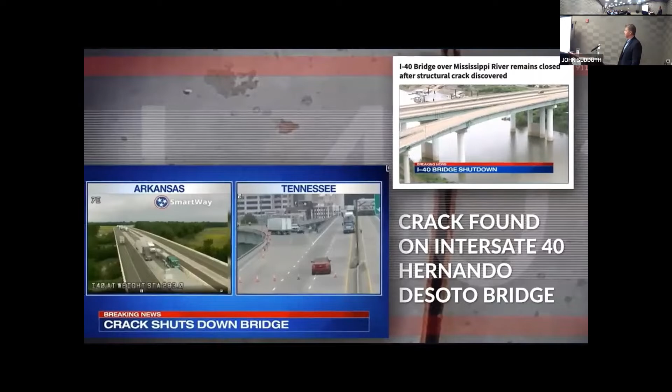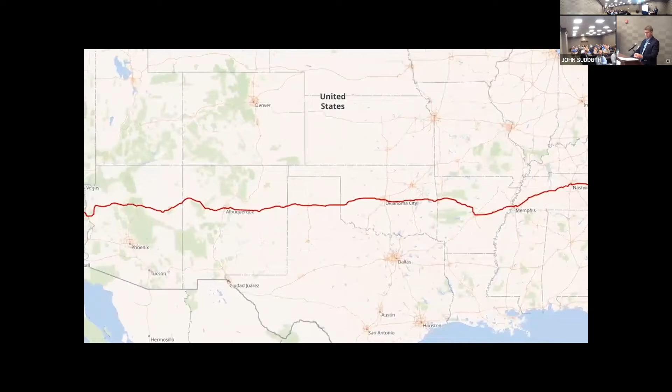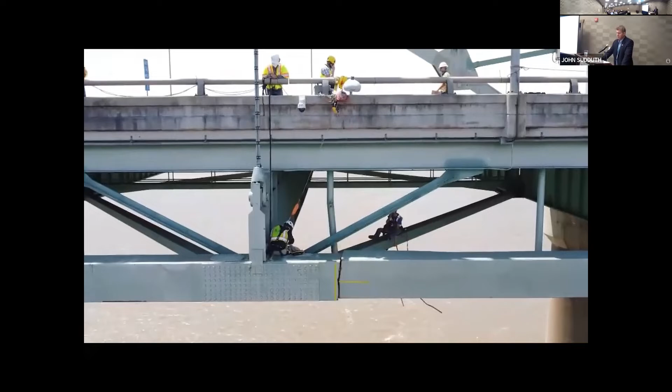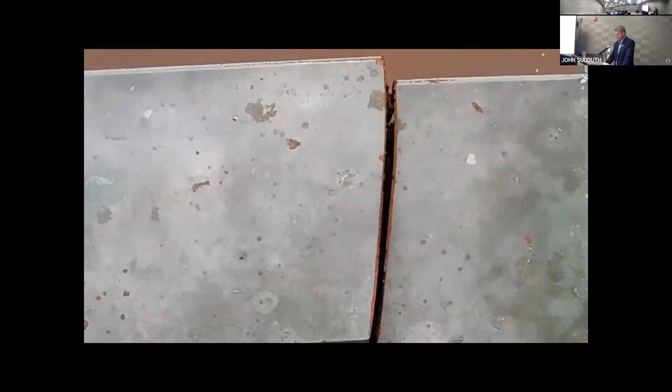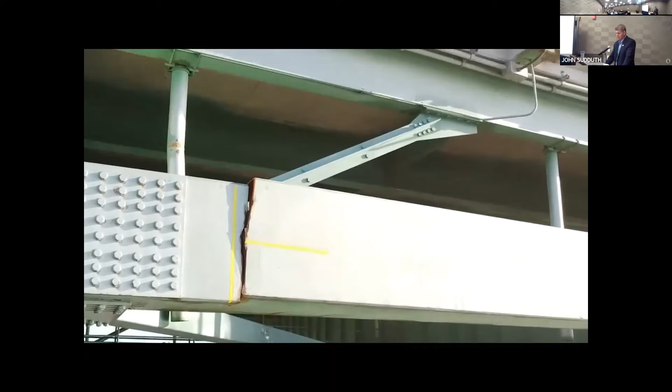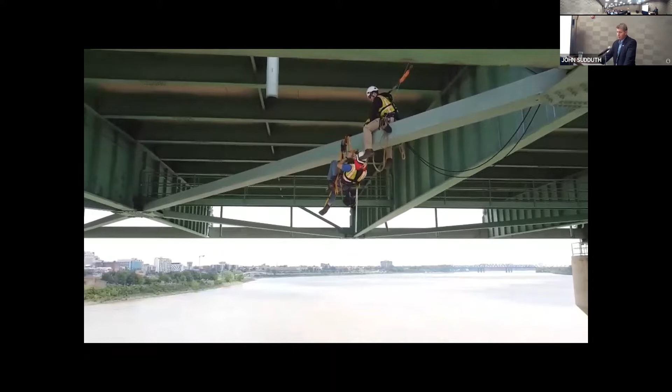To actually see it in real life is startling, but it took a few minutes for it to sink in. Because we had only seen the crack from the top, we really needed to understand the extent of the damage around that member, so the UAS team set up on the bank of the river. The design of the repair was challenging because one of the first things we had to do was determine whether or not it was safe for the work to be done on the bridge. We had to understand the condition of the bridge at the point of the fracture, how much load was in the members, and how much stress was going to other places of the bridge. So we focused on getting the bridge stable so that we could strengthen it first, then safely work on the bridge and reopen it to traffic.

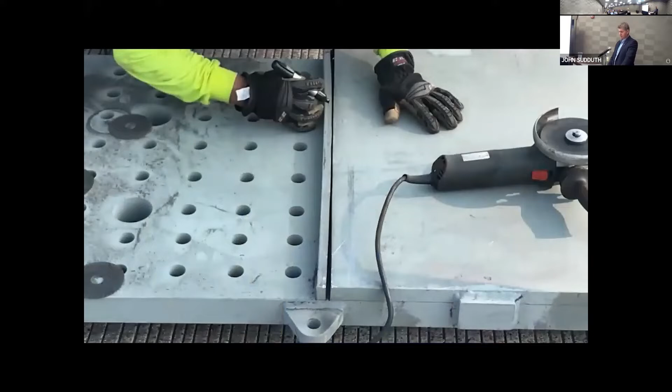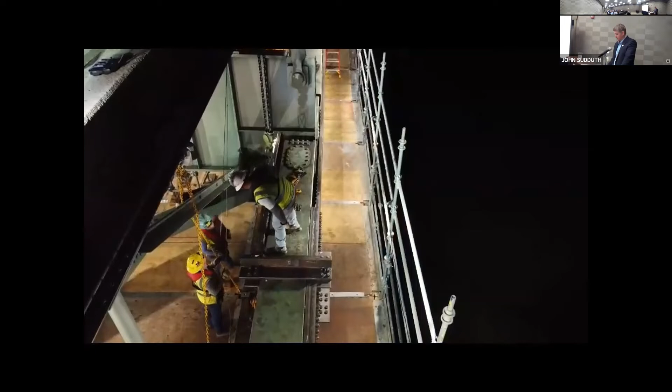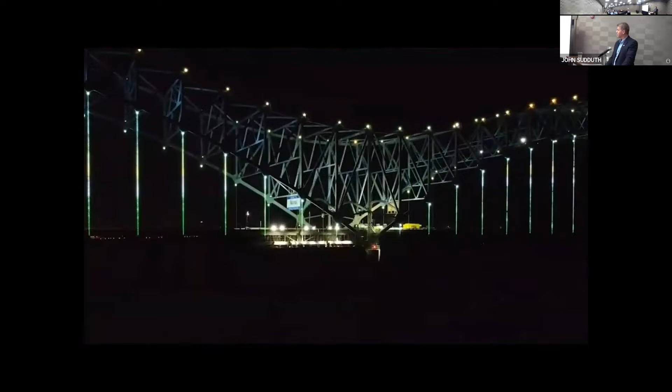From a client's perspective, TDOT is looking for a solution that will carry this bridge for decades to come. The design team is looking for a repair they can stand behind, that they know will meet TDOT's goals. And from a contractor's perspective, we're looking, first and foremost, at this as an emergency repair job: how can we implement a repair as quickly as possible and get traffic open, while maintaining the safety of personnel doing the work and avoiding further damage to the bridge itself. Basically, put the bridge back to where it would have been originally, plus add additional capacity, which gives TDOT and ARDOT confidence to tell the public that this bridge will be here as a landmark in Memphis for decades, or 100 years to come.

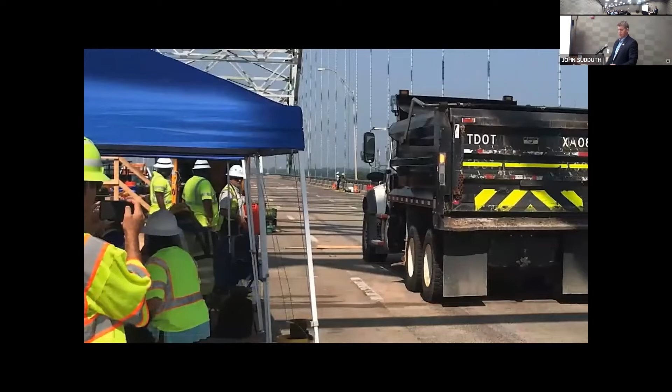Everybody's focus and advocacy to get that bridge open, to do whatever was needed, working together was pretty incredible to me. There were so many people involved at one point or another, and each one had a very important part in getting that bridge open. The multi-agency coordination was amazing. It was ARDOT, TDOT, the Arkansas and Tennessee Federal Highway Administration offices. It also included our consultant, AGCD, Michael Baker, and the contractor, who came on board pretty quickly after the fracture was discovered.

I can imagine what the people of Memphis and the people traveling through Memphis were feeling at the time, so I appreciate whatever patience they had. I'm thankful for their patience, and I appreciate all the people involved in this process of getting the bridge open safely and quickly. Thank y'all very much for what you did to make that happen. Thank you.

All right, so that gives you a little bit of an introduction to the problem and the scope of what we were dealing with in this situation. It also really relays the importance of this crossing to Memphis and to the regional population down there. So we're going to talk a little bit today about the immediate response, some of the modeling and analysis that was done, our three-phased approach to getting the structure reopened quickly, and some of the lessons learned along the way.

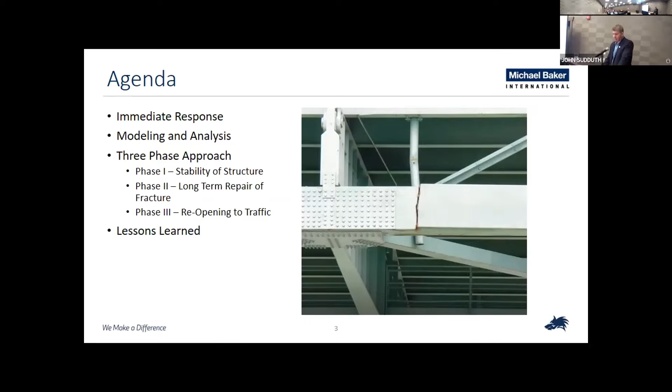So the Hernando de Soto Bridge is located between Memphis, Tennessee, and West Memphis, Arkansas. It's named for the 16th century explorer Hernando de Soto, who reportedly died near south Memphis after exploring that stretch of the river.

You'll recognize the bridge. It looks very similar to one we've got just here on the side of West Louisville. It's not unlike the Sherman Minton Bridge. There's a lot of parallels there. We'll talk a little bit about this.

This is a two-span continuous tied arch bridge, 900-foot spans, designed by Hazlett and Erdall. It's obviously a very important connector to the regional community. It opened in 1973 for the cost of about $57 million, and locally in Memphis it carries 6 of the 10 lanes across the river.

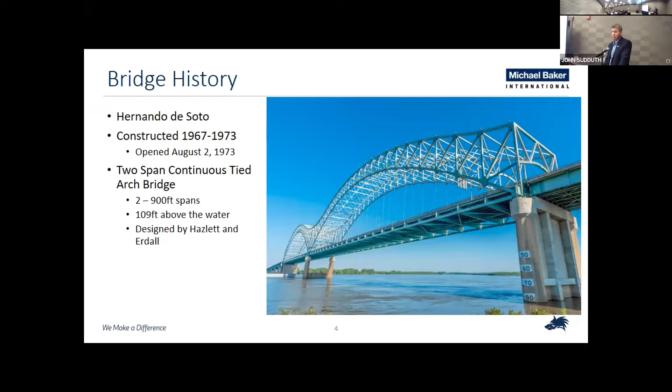The importance of the bridge was really underscored back in 2000 when the two states combined and realized they needed to retrofit this bridge for seismic considerations. That caused about a $200 million investment to improve the resilience of the structure for the long term. So, a very important crossing for the local community.

So obviously we've got an emergency out there. There was a critical find. We put our heads together to try to figure out what we could do first and how we could do it quickly. We drew upon a lot of lessons learned. We've got an emergency response plan that we developed after the Brent Spence Bridge. We started going through that and gathering as much data as we could.

In addition to the field response, we had a number of different teams that we had to get involved. We immediately began to assess the problem, diagnose it, and try to compartmentalize it into different areas that we could work on.

We knew we had a team that ultimately had to strengthen this bridge so that we could work on it. We knew we needed the analysis to get going immediately, and we also saw some individual solutions such as post-tensioning as having some benefits. So we began to quickly mobilize our teams to really get productive and dive in on this project.

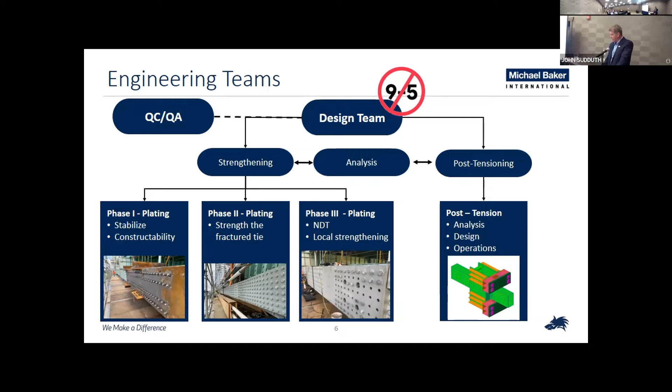This was something we knew was not going to be a 9-to-5 kind of challenge. This was one of those things where everybody's got to be committed to the project. We pulled a number of different doers in from different projects in different parts of the country. All told, we had about 60 individuals working on this project from 20 different offices across our company.

Not knowing the full severity of the fracture, we set about to use our UAS technology and techniques. They set up on the banks of the river on the Memphis side and started to monitor that. The bridge was being monitored after the fracture by both ARDOT and Michael Baker. Both organizations used drones to monitor and scan the rest of the bridge because we didn't know if we were dealing with a one-off crack or if we'd find other locations out there.

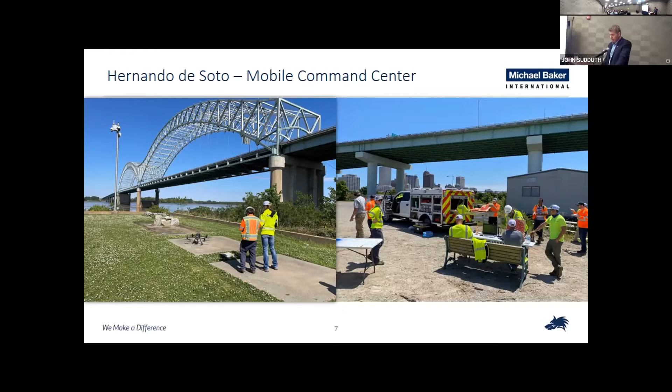We needed to know the severity. We needed to know if there was any distress elsewhere in the structure. So a complete scan of the bridge was really a helpful thing to give us more information on that.

Again, they set up on the side of the river, and one of the things we did was really a kind of unique thing. We wanted to get more information on this fracture. This was a couple of days into the project where we had identified a potential repair option. But in order to move forward with that, we really needed to know how much that tie girder had displaced during the fracture. So we set up to use kind of a combined UAS and rope access mission, if you will, to get out there and get some hands-on details.

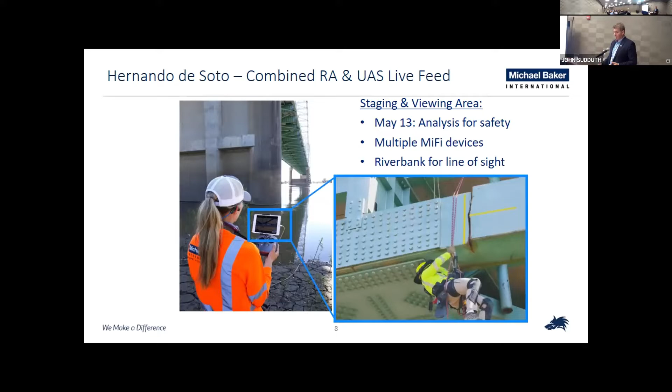In the left-hand picture, the woman's got a monitor there where she can monitor what the drone is seeing. So we utilized the drone to capture the rope access and used it also for communications. One of the things we did during that was utilize a conference call, a Teams meeting if you will, so that we could communicate effectively with the inspector in the field by Bluetooth. He had his cell phone and his earpiece and was able to hear what we were looking for.

And that video goes something like this.

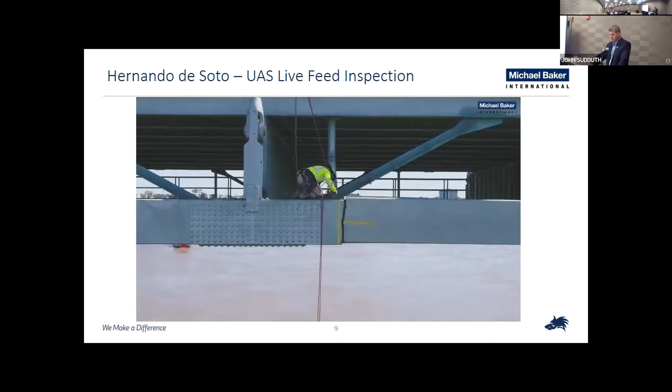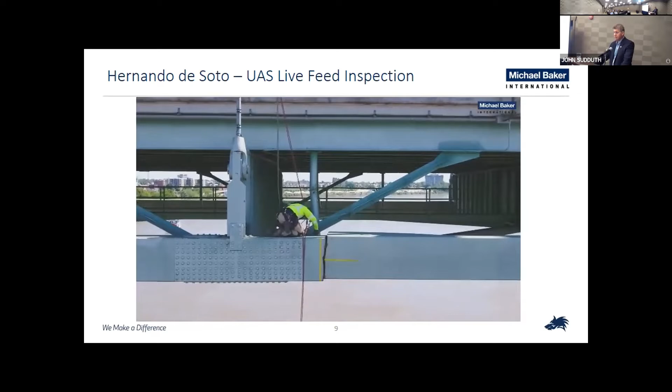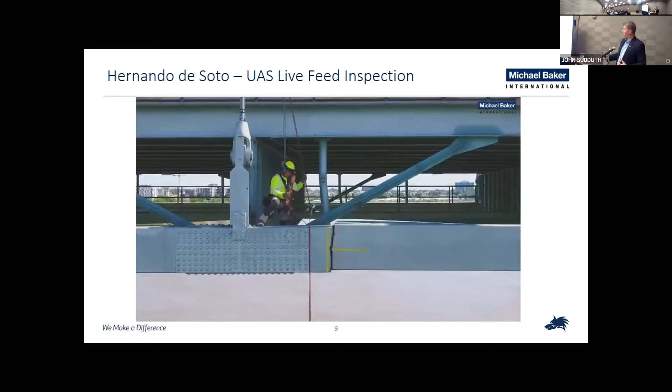What that really did for us was that gave us real-time information, right? This was a real good opportunity for us to get data directly from the field. There was no confusion over what was being measured or how it was being measured, and any additional measurements that were needed were gathered immediately. That was an extremely powerful thing for us because we had real-time data that we could work with. We were able to take that back and modify designs and make sure that we had clearances that we needed to make connections fit up.

And you can see some of the photographs that were taken both from the drone and also from our inspector of that fracture location. Again, these were some of the early indications that would eventually tell us a lot more about what happened with that fracture. And then the lower right hand, just to orient you, that is actually looking at the bottom side of the box, looking up at the end of the fracture.

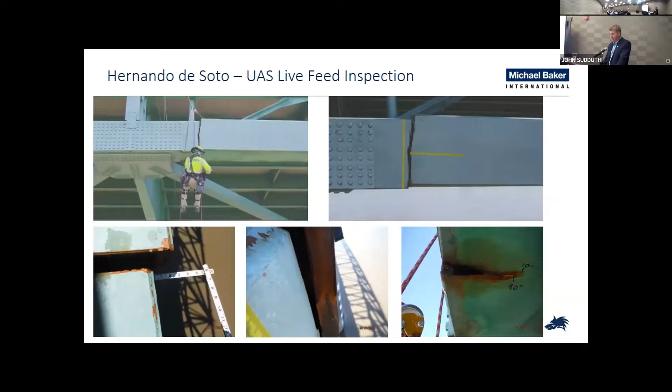So this fracture occurred in span B. Again, this is a 2-span continuous bridge. It's completely symmetrical about the center pier. You'll notice that the fracture location occurred a couple of panels away from that center pier. So on the north side, the upstream side of the bridge, but you can see the basic floor beam and geometry of the bridge there.

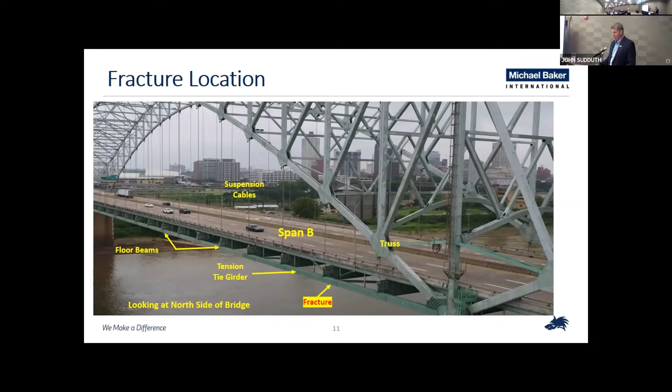Now, to really understand the problem that we were dealing with, you've got to kind of understand the detailing that was involved with this. And this bridge was set up, like I said, almost exactly like Sherman. The floor beams were spaced at 37.5 feet on this, and individual field segments of the tie girder went about 75 feet. So they essentially went from even joint to even joint along the bridge, and then they were connected at those field splice locations.

Now, they were dealing with really thin material out there. They were utilizing 100 KSI material to lighten that tie girder and make it very efficient. But the problem that led to was at these bolted connections, at any connection, really, they had problems with net section fracture on this girder. So they had to upsize or upset those plates to 2 1/4 inches in order to make the connections work.

Okay. So what that left us with is, you see those 4 rectangular boxes down there. Those are all individual welds, full joint penetration welds that went at each one of these tie girder locations in each segment. So you had 4 welds times 4 on the top, 4 on the bottom, 4 different faces of that. So you had a number of welds that were stacking up here really quickly.

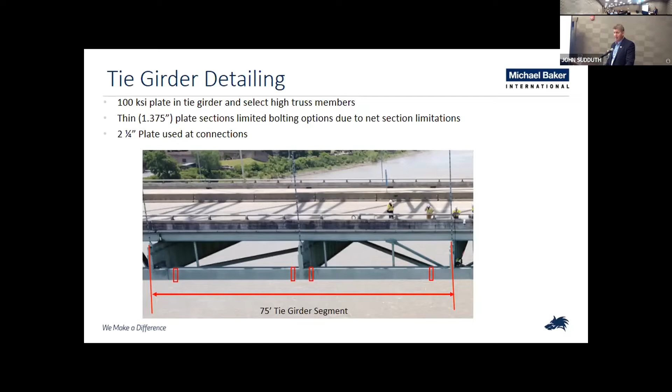Now, the one major difference between this bridge and Sherman Minton is it's accessible on the interior. There's actually holes that you can get in, you can go in and you can inspect these welds. They have the same type of welding issues, but you can inspect them from the interior. This box was completely sealed by diaphragms just at the end of those bolted connections. So these welds were inaccessible for really the life of the bridge. Nobody was able to look at them from the inside, only from the outside. So that's an important detail when you start to look at the welding connection.

So this is a picture of the inside of the box. You can see here the weld. You can see the 2 1/4 inch plate on the left and the 1 3/8 inch plate on the right. Again, major transition thickness there. You've got the bevel, and then obviously the weld material that's deposited there. It's real easy to find these welds on the inside of the box if you can get access. Not so easy on the outside where everything's ground smooth and you've got to locate them. So being able to make sure that you're looking at the right area is a critically important thing.

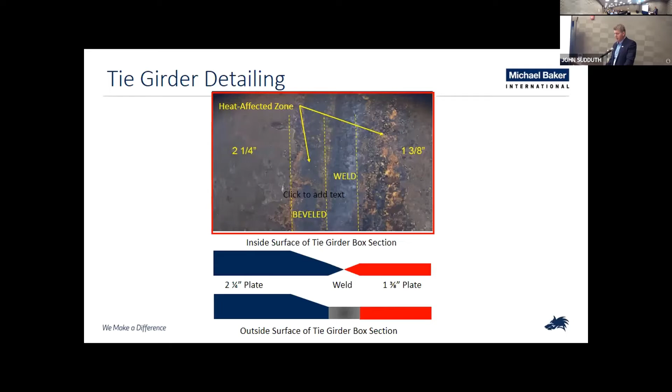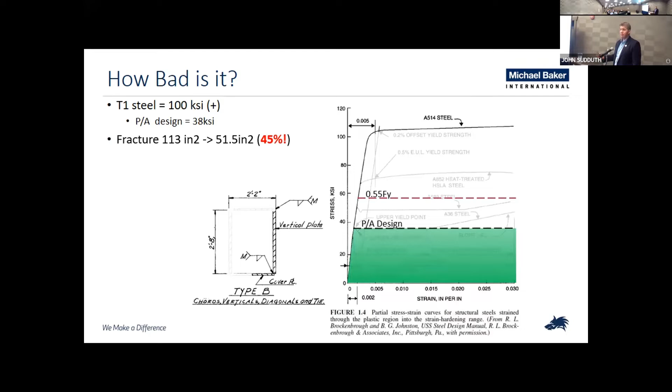So obviously we know at this point that we've got a fracture, but we need to understand fully how bad it is, right? We knew we had 100 KSI steel and the base design gave us about 38 KSI in just P over A. When we take that fracture out, we lost 55% of the overall section of the tie girder. It's a tremendous amount to lose. But thank goodness they were working back in allowable stress. So they had some pretty significant margins back then.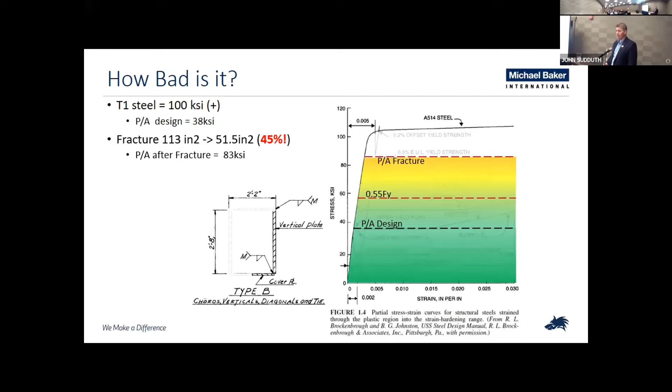When you take that material out, you're left with about a P over A of 83 KSI. Okay, you're still under yield, right? Well, there's a few other things that we haven't accounted for yet. Eccentric loadings, right? We've got a section that's no longer a box. It's now basically an angle being loaded through the center of the box.

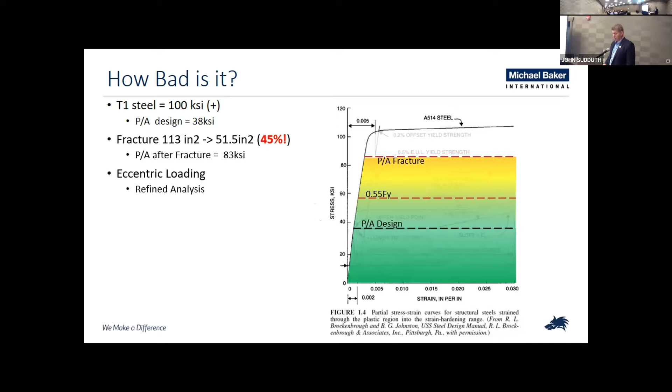So we took that to a refined analysis. This was something that actually Jason did overnight. That first night was to create a crude model that we built off of to give us better and better results as we went along the way. That refined analysis showed that we had some significant issues there. We had some very high stresses. We were over yield in some locations on that box.

And there were a lot of unknowns, right? We had the planned dead loads, but we didn't know what the structure actually felt or actually experienced. We didn't know how much load had redistributed throughout the structure. Again, transient loads and other factors came into play. All in all, we were dealing with some very thin margins of safety out there. And that's why we were very careful about the approach that was chosen and taken there.

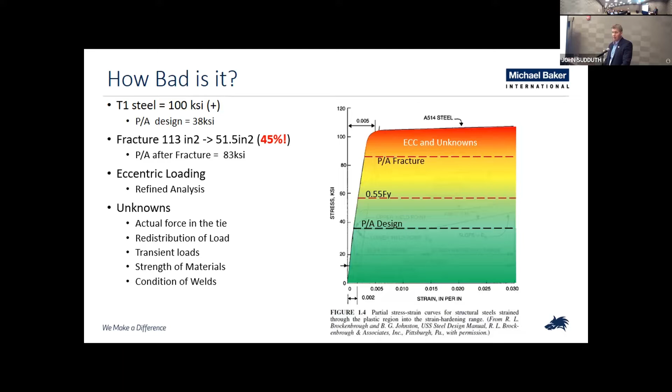So again, just to talk a little bit more about the modeling and modeling philosophy, we built upon the simplest models. We started with a 2D model, matched plan geometry, matched plan loads to give ourselves confidence, built a 3D model, and then expanded that out so that we would refine that loading, refine those models all throughout the way to, again, build that confidence and make sure that we understood the behavior.

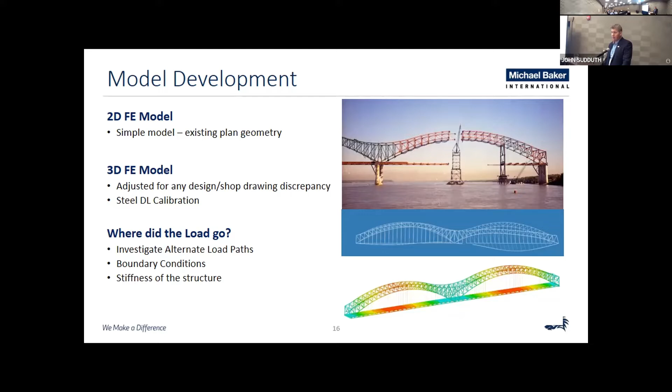One of the important things for us was always to identify, were there other alternate load paths that we could account for? In a structure like this, in the tie girder, there is not. It really hasn't got another place to go because it's going to overstress the bearings and the other framing members. So we began to look for solutions. How do you fix this thing? We explored a number of things from the permanent fix to a number of different temporary solutions.

And one of the things that really started to show promise was to lengthen a splice and basically go from that field segment to as far as we could get on the other side. So that was the direction that we set forward with and were looking into.

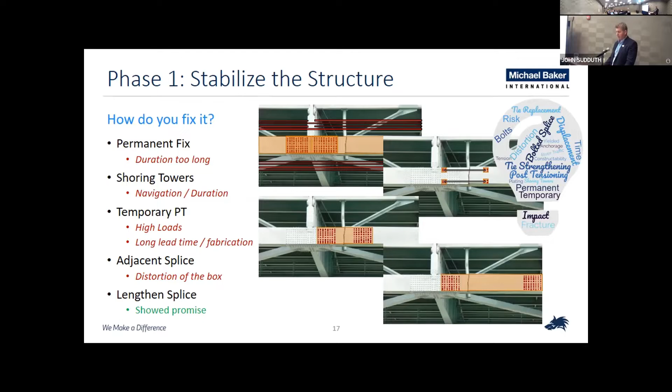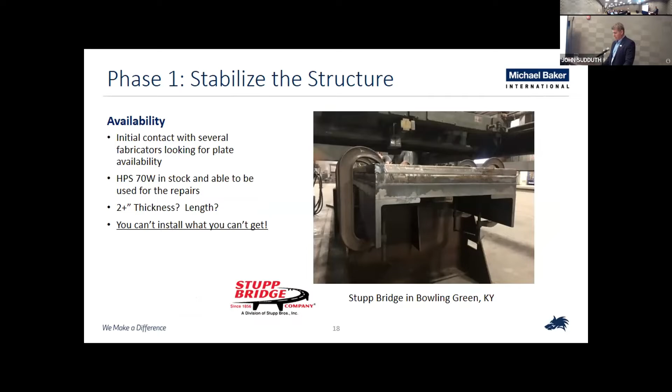We worked very quickly with Stupp and a lot of local fabricators to identify materials. Stupp happened to have some HPS 70 material in stock that was suitable for the repair effort in this case. And it was important for us to be able to design a repair where we could get the material quickly and efficiently, because otherwise we're going to be waiting for materials and it's just going to increase that schedule.

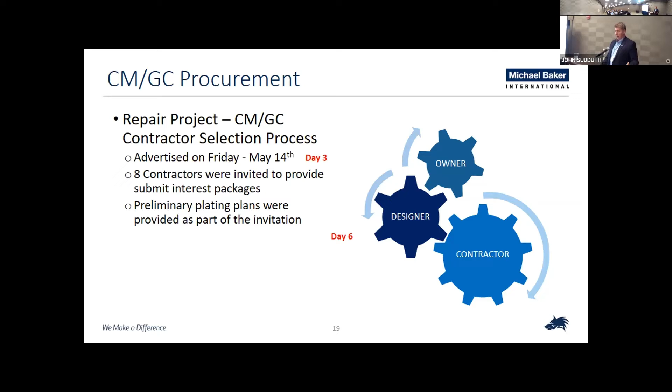So one of the things that TDOT identified early on was the need to go to CMGC on this project. They understood the complexity, the risk, and the importance of means and methods for this particular project. So with that in mind, they set about to advertise on Friday, May 14th. And our goal was to have plans delivered, and we did. We had that out there ready to go 3 days after the incident happened. So they left that out to the contractors on Friday, asked for their responses by Monday. How are you going to approach this bridge and fix this bridge?

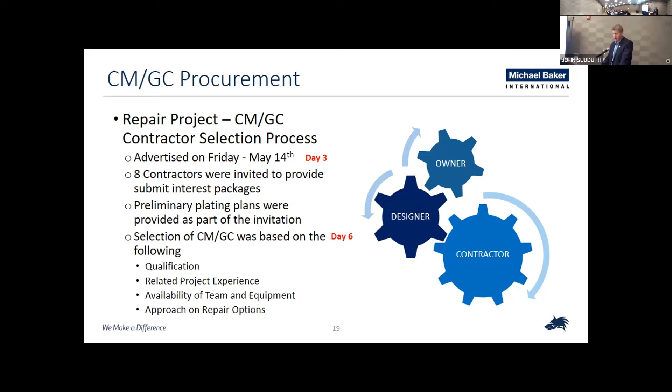So by Monday, they made the selection of the CMGC contractor based on qualifications, their related experience, their availability, and their particular approach to the repair options. So that Monday, they selected Kiewit Infrastructure to do the work.

Now, it's an important thing to think about. Why would you use CMGC on a project like this, right? Well, it's really about risk control. You use CMGC whenever innovation is needed, whenever you're trying to mitigate risk, or whenever you've got some need for collaboration. The means and methods really help to drive that. We needed to collaborate on how this bridge was going to be repaired because we knew we had some potential issues out there with the high stresses that we were seeing.

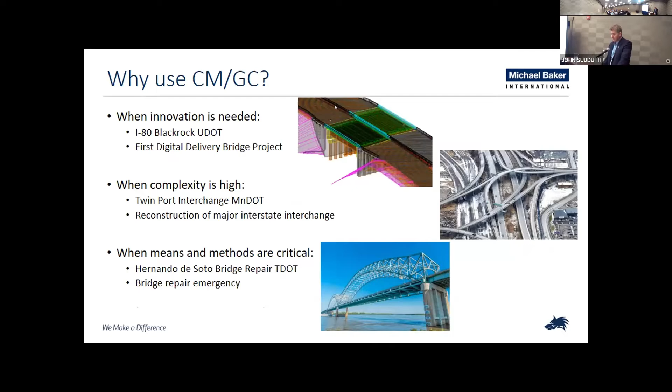So once Kiewit was on board, they immediately started collaborating with us. And that was really a key to the success of this, to drive down the risk. One of the things that we were concerned about from day one was getting out there and starting to hammer on those bolts with an impact gun, right? You're sitting there with a fracture less than 18 inches away from you with an impact gun. We didn't know what that was going to do to the structure. Nobody knew. We knew we had to be careful at this point.

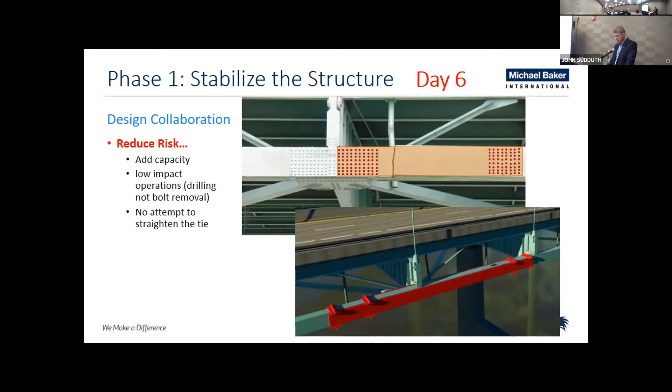Now, again, we took that design change, and we processed it immediately. We had crews working overnight to get those plans done. And by the next morning, we had plans ready for TDOT to bless and send off to fabrication. So they released them for fabrication the next day. Stith and their crew got involved and started doing the shop drawings immediately. Within 2 days, had shop drawings. Fabrication began on the 21st. And by the 22nd, day 11, TDOT had steel loaded up on a truck and bound for Memphis.

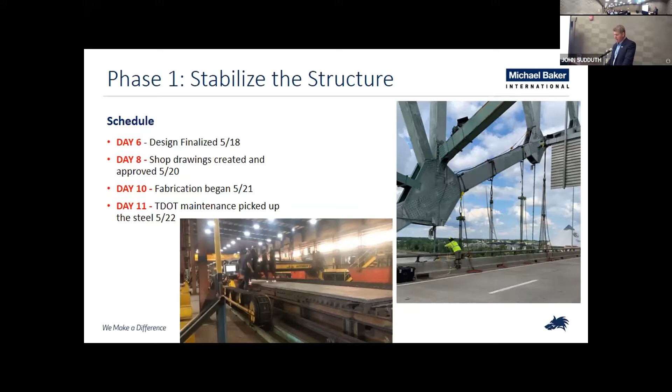So with that, Kiewit wasn't exactly sitting on their hands. They were hitting the ground running. They immediately started setting up a work platform underneath the structure. And you can see from the picture in the upper right-hand corner, once that steel was delivered on site, they were ready with these come-alongs to get out there, get that steel into position and fly it over the site so they could start bolting things up. So it was really a very efficient process. With their chain falls out there and everything else, they were able to get that steel in position.

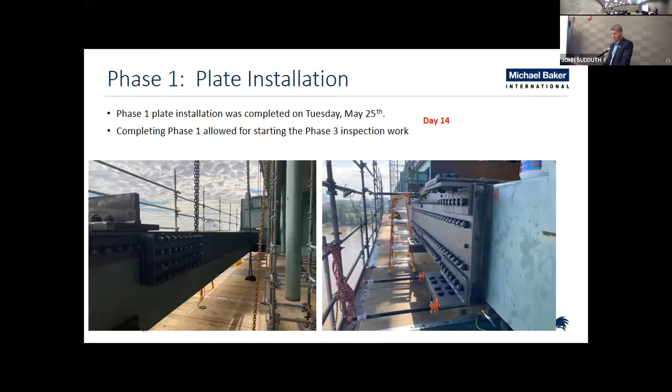The phase 1 plating was installed and completed on Tuesday, May 25th, 2 weeks after the fracture had been found. And what that allowed us to do then was to really start the rest of the repair work. We were working on the phase 2 repairs all along the while in the background with a separate crew, but we were able to then get started on the next phase and subsequent phases and turn our attention to more fully focus on that.

So phase 3 was really about inspecting this bridge, giving it a clean bill of health to reopening. You heard in the video about reassuring the public, and that was one of the things that ARDOT and TDOT wanted to do in the midst of this, was to make certain that there were no other issues out there and that this bridge got a clean bill of health. So Jason will talk a little bit more about the inspection effort in the end and the forensics there. So Jason, you want to come up?

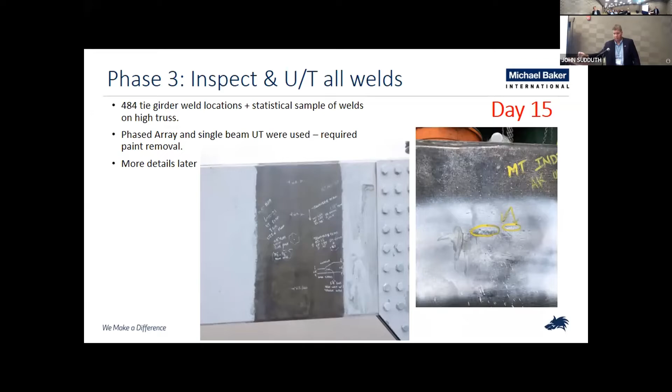Thank you, Aaron. As Aaron mentioned, the first step of this was just to stabilize the bridge. We had to ensure the safety of our structure because we had very little confidence, or had so many unknowns going along through there. And so at this point, we had to say, all right, how can we get this from being stable to a permanent fix? We've got to be able to allow the public, everybody, to be able to drive on this bridge. And that was the next stage.

So as you can see here, back it says 5/11. This is day one again of a team working. How can we fix this permanently? So we have the displacement, we've got movement of the tie. We had to get some of the load back out of it. So almost immediately came to the idea, we're going to have to post-tension this thing, squeeze the tie back together and try to find a way to figure out how to do this. And so that was our concept. We're going to post-tension this thing and work through it.

So let's talk a little bit about that thought process. As Aaron mentioned, in a presentation like this, we're going to get up here and tell you the story, and it seems very linear. But for the people that have been through something like this, it's never that way, right? You run down a lot of blind alleys, you run into a lot of dead ends, and you've got to run down a lot of loose ends that just fail. And that's just part of the process, right? But you have to work your way through this and find the best solution. And that's essentially what we had here as well.

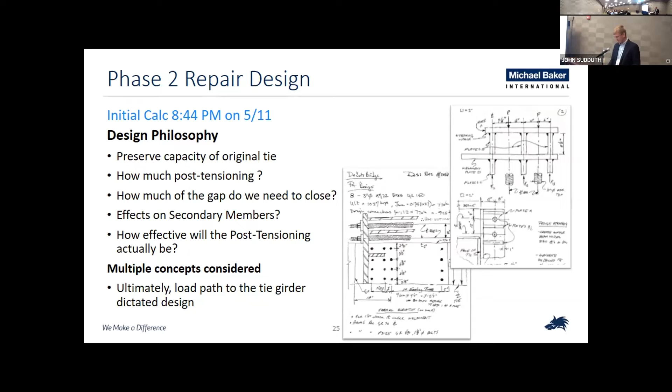So when we came through here, our initial thought and the direction from the owner was we've got to get this tie out of here. We've got to find a way to remove this tie.

So this was our concept: we're going to come here and post-tension this bridge, remove the tie, and replace it with a new steel tie. As Aaron mentioned, we developed this BIM model that allowed for visualization and clash detection. We showed this to the contractor and they said, you want to do what?

It was really this picture that was eye-opening. Communication is really important, and that's our job as engineers, to communicate an idea to a contractor. It was this visual communication that really hit it home. They said, you want us to have this bridge held on by thread. Now these are 3-inch steel rods, so it's not exactly thread, but that's the idea.

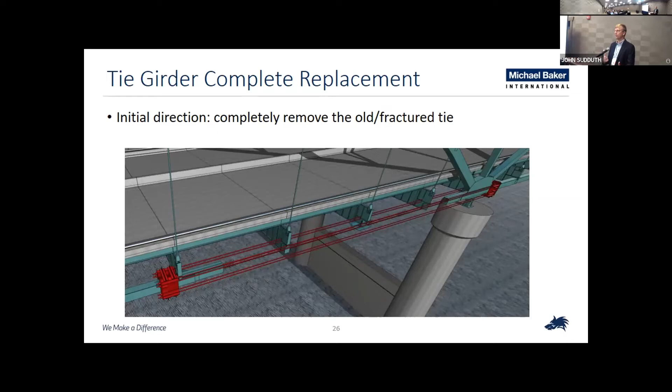They said, well, what if we have a crane that drops part of that new tie and hits one of these things? What's the redundancy? How are we going to look at this thing? It gets back to communication, means and methods, talking to the contractor. So they said, well, we would like to try something different. In the end, we did.

We ended up not cutting out the tie, but did a similar approach to what we did out here on Charlotte. We did post-tension it, but then came through afterwards and put in plating along each side that would be able to take the full load if the tie were to continue to fracture. There was another issue with the tie at that point.

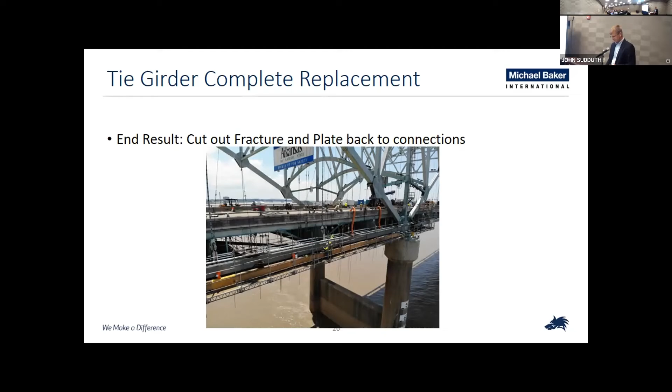So let's talk about the post-tensioning. The post-tensioning for this were 8 3-inch diameter rods. We had very large weldments—that's what you see in the color graphics, with the analysis done on these large weldments.

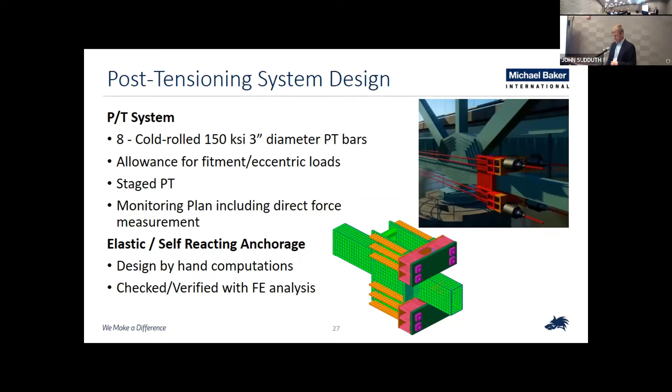We had to be able to take the load from those post-tension rods and bring it back into the bridge, and vice versa, following that load path all the way through, all the different twists and moments. We did allow for a certain amount of imbalance as would happen while stressing these things, and had to understand those interactions.

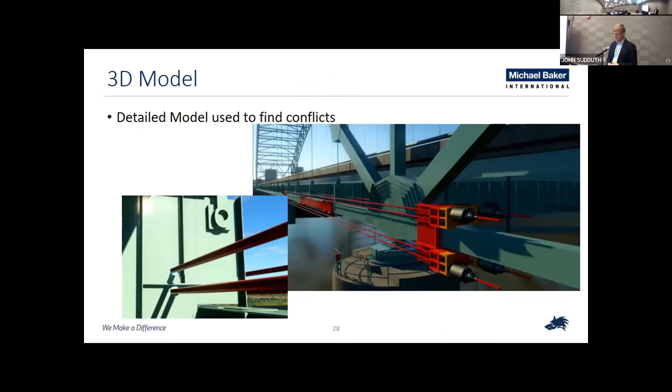Again, we have the model here, and we use it for clash detection. There are a lot of details on these old bridges you have to try to work around—stiffeners, places where we have to add extra plating, etc. All these things are very useful for that.

Graphically, what do we do to help people understand what they were working around? None of these surfaces are smooth on the outside—we're going to have other splice plates and other things in the way.

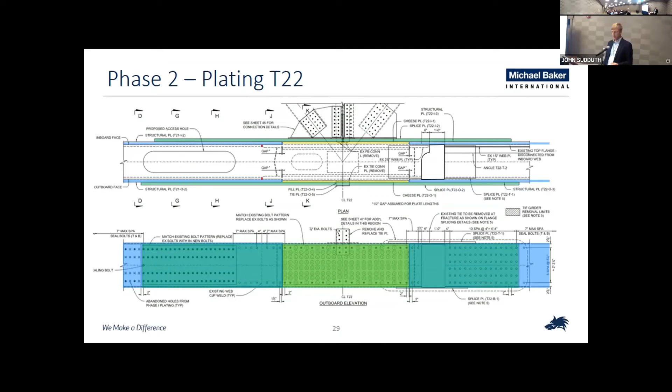So on a project like this, we came in and took out the fractured region. Then we come in with some of the main plates that run the length of the tie—but we have a splice here we've got to work around. So we have to come in with some cheese plates and additional splice plates that run around our tie, same thing on the inside and the out. We have to piecemeal this thing to work around what's in the way, all the different portions, and make that happen.

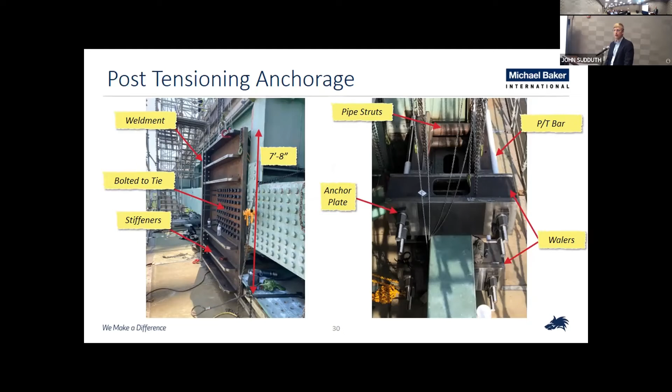In the end, here's a couple of pictures of what that looks like in person. These are fairly large weldments that get put into place, with a lot of bolting involved. We're connecting these into existing splices that were out there—we were able to exchange these bolts out and make this all happen.

For those who haven't seen a post-tensioning operation—the way we did this, we had 4 post-tensioning jacks. There were 8 rods total, but we did these symmetrically, with 4 working on the inside and outside, to make sure the post-tensioning didn't add eccentricity or additional damage. It's the do-no-harm approach mentioned in our video, which we continued to follow throughout.

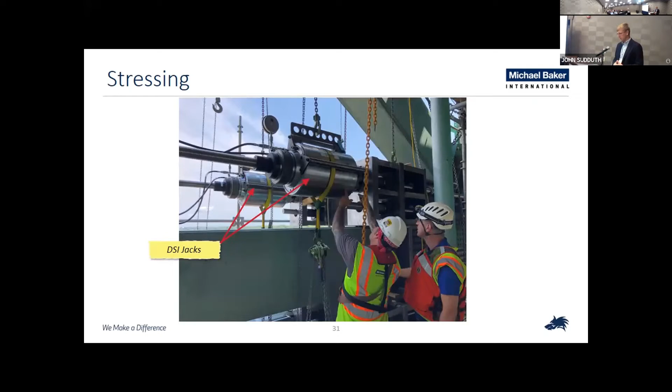We had to do quite an extensive monitoring program. We had a lot of strain gauges, and there's a Dynaforce, which is actually a part of the post-tensioning that can tell the amount of load in the post-tensioning rods themselves. So we were continuously monitoring the bridge to see if it was behaving the way we anticipated.

Were we getting the load out of this thing? How much of the post-tensioning load that we were applying at each end was coming out of the tie? How much of it was going into the secondary member? All these sorts of things.

The other parts of it leak through floor beams and into other aspects of the bridge. That's kind of an inefficiency. So we had to understand the efficiency of the post-tensioning to make sure that load was getting in there and that we were removing a sufficient amount of it.

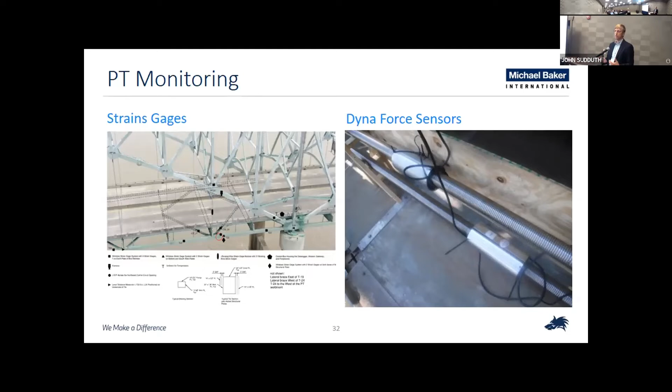In the end, we took out somewhere in the order of about 1.5 million pounds, about 1,500 kips, I think, out of the tie girder, out of in the order of about 4 million pounds of what was in it as design dead load.

When we get to this point, I felt a lot safer. We had this phase 1 approach in, we had the post-tensioning on this thing, we reduced the overall stress in the cross section, so we feel a little bit better.

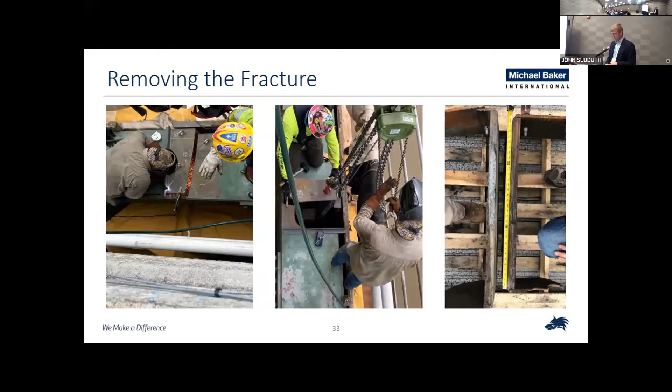We did remove the fracture so that we can do the forensics on it. I'll talk about that in a minute, why we think this happened or how this happened. But we were able to remove that, and in the end that's what it would look like completed, nice and clean.

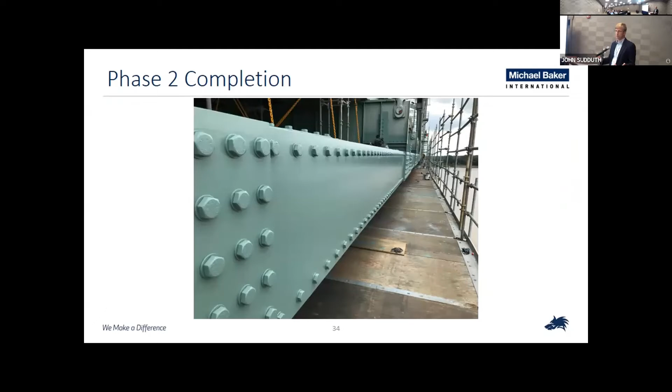For those that do inspections on the Sherman-Minton Bridge out here, it all looked fairly similar. The end results of this fix were very similar to what you'll see out of the Sherman-Minton Bridge today.

Aaron mentioned confidence, and this was a big important part of this. If you have one crack and one major incident on this bridge, we have 500 other welds out here that may or may not have a problem, and we need to know what those are and what we're going to do about them.

So while we were doing this inspection, HNTB was in charge of doing the NDT work. They hired some people and went down through here to inspect the 500 other welds on the bridge that hadn't fractured yet, trying to figure out what the issues were and how many of these had problems.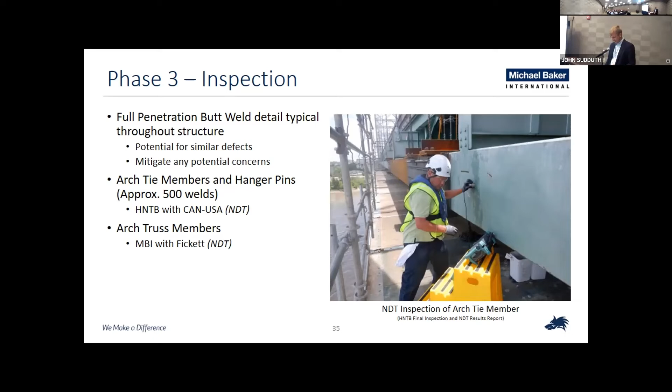In that same chunk of steel, there were 4 other surface breaking indications that would show up on an MT test. Again, all these on the inside, all uninspectable in this particular bridge, but there were other cracks in this structure in the exact same weld that fractured.

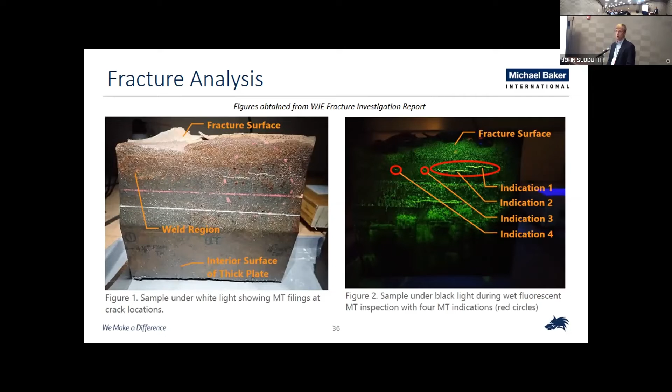So that was kind of worrisome, that we needed to try to look at this. They had to recalibrate their NDT in order to anticipate and be able to identify these other small hydrogen cracking issues that they found in here.

In the end, we ended up with multiple locations where we had large indications in the weld. For those, we would plate over the indications. For smaller indications, we would just go in there and take a core out, drill out that small indication, and remove those from the bridge.

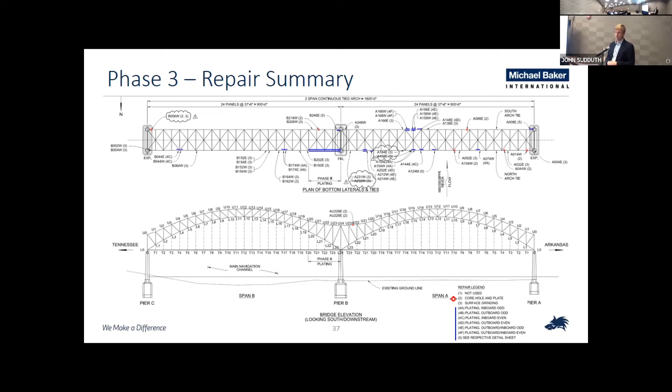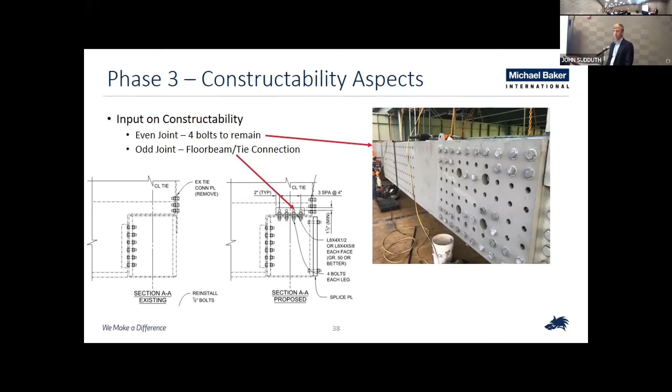So I think we had 17 plating locations in the end, and 15 or 20 places where we were doing the coring. Again, we continued to talk with the contractors and refined our designs based off their input on what they said would be useful, to figure out how we could go about the process more easily and efficiently.

Here's a typical repair over a couple of these splices at the odd joints. The odd joints, as Aaron said, had additional requirements anywhere we had to bolt to the floor beams; they had to upsize that very thin plate of the box girder, and at those locations they had to have these full penetration butt welds.

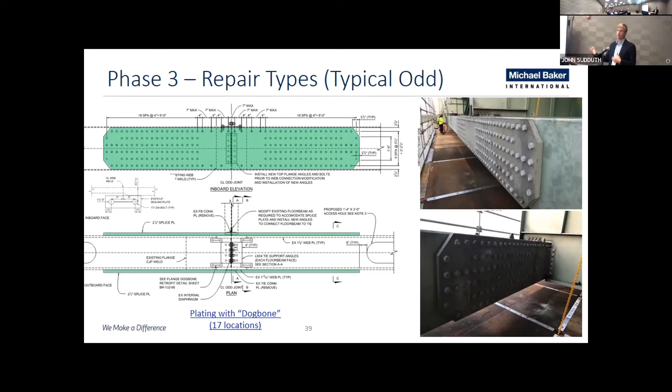Again, if we had major indications, we would go in and do a plating operation. All the plates were designed such that if a fracture were to occur in that plate, these are catcher plates, they don't hold any of the dead load. It would only be in a case where a fracture event occurred, similar to what happened. Now all of a sudden we have something that can catch that load, can carry the load through, and not have the similar result we did before.

Typical even plates showing up there. Several details. We ended up leaving a suite of all the different types of repair options, so we kind of have a pick and choose menu as they found more issues with the NDT. Again, installing these things fairly similar to that.

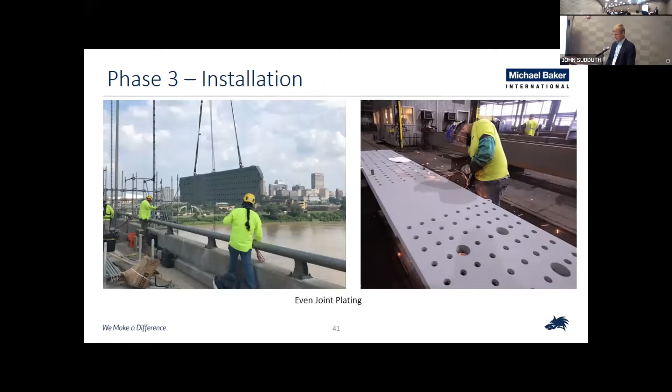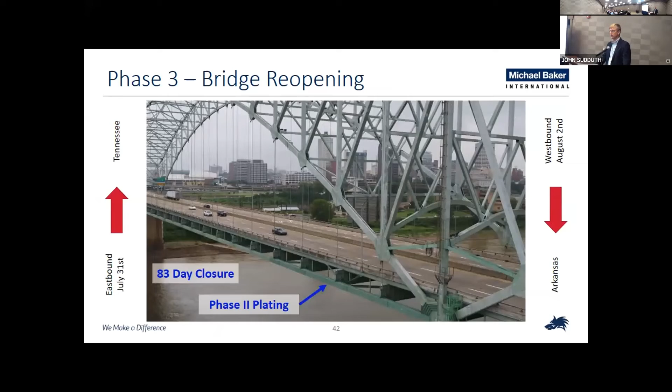In the end, the bridge was closed for 83 days. You see the phase 2 plating in there. We finally opened it up after all the phase 3 plating, or all the plating, was done for the rest of the ties. Again, it was about confidence for the public, ensuring them that the bridge was safe to open up and safe to traffic, and we were able to get that done.

Let's talk about the forensic analysis on this. It's interesting to me what they were able to find, and I'm not a weld expert, but we pulled that section out of the bridge and laid it open and looked at it. You could tell there was a very, very poor quality weld in part of this. There were cracks, and the fracture surface looked rough, with porosities and other issues being a problem with this weld.

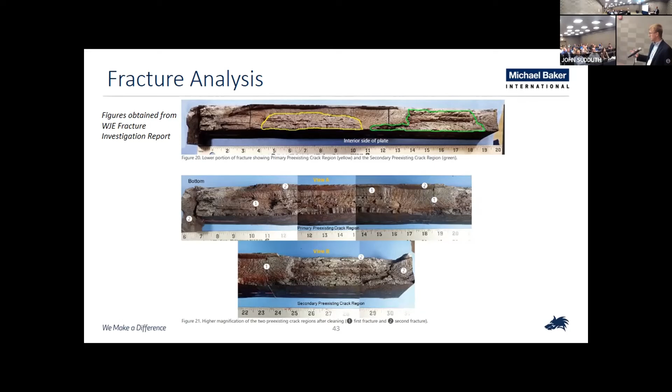This was a problem when you had improper preheat and other issues. Today, we mitigate all those sorts of things with proper preheating, in addition to having inspection that occurs 48 to 72 hours after the weld. For this particular one, they welded it, probably did do a visual check, didn't see an issue after the visual check, closed the box up, and it was never seen again. It did continue to expand, which we'll show here in a minute. One other area of note: at the area of the crack, there had been a previously identified issue here.

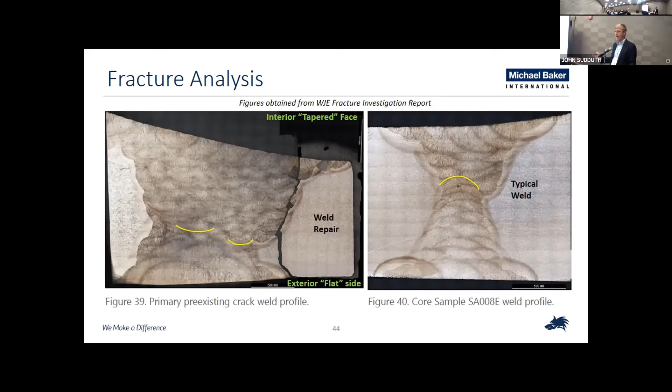So when this thing was originally built, there was some sort of defect found. They gouged out the defect and re-welded that whole thing, making a weld repair. After that weld repair was done, evidently, this was happening—we had another hydrogen embrittlement crack in the repair. It actually occurred in that repair weld.

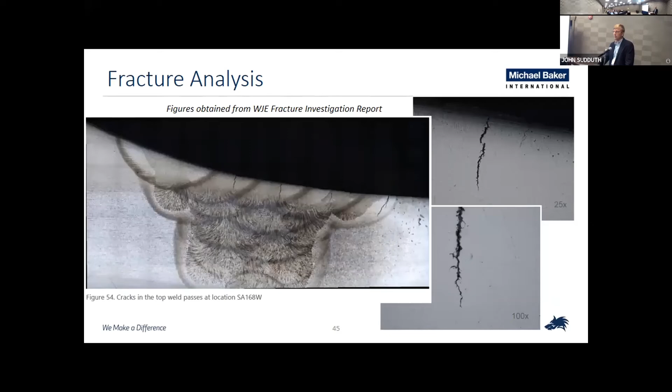It was not the only one we found. We took some other cores out there after the NDT. This is another core, and you can see here there are multiple cracks showing up on the inside of this box. Some of the welds had similar issues with hydrogen embrittlement.

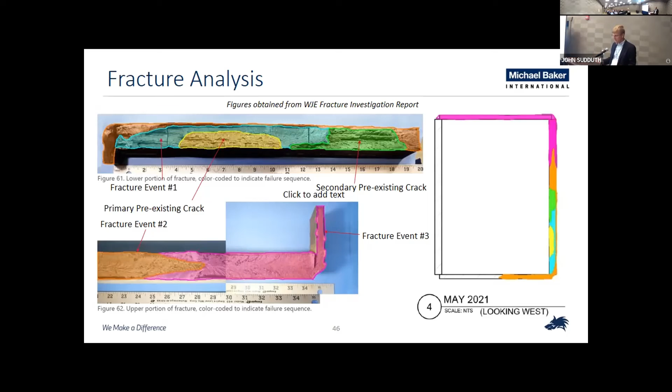As we wrap this little talk up and try to explain the things, appreciate your attention on it. Some of the lessons learned, again, with anything.

Communication and collaboration - you have to be able to communicate, talking with the contractors, with the owners, with all the stakeholders involved, be able to communicate ideas, working towards a common goal. You're going to get there very quickly, especially when everybody's got a focus and motivation. I took a lot of internal, a lot of external meetings, right, that we're working through this thing. And we were able to use the CMGC process very efficiently, in my opinion. It did reduce the risk overall to the owner, to the contractor, to the engineer, as we kind of thought through ideas in a very collaborative way.

We definitely improved constructability, right? Means and methods are important to the contractor, and we could get direct feedback from them. You know, would this be a better approach or that one?

Material procurement - contractors are much better at this. We spent a lot of time in those first early weeks. I was talking to multiple fabricators to find out, hey, what steel do you have available? How long of a plate can I design for you? And they were very open about this. This is something I would talk to you about. If you have issues like this, or any time, call your fabricators. They're the ones with the material. They can get that sort of information. But the contractor was really much better at that. They were able to coordinate that stuff for us, getting bolt lengths, when could the lead time for those be.

That was very helpful. But be prepared for challenges and setbacks. We're going down a lot of blind alleys. We're going to have a lot of dead ends that we run into. That's just part of the process and some of the fun, I guess.

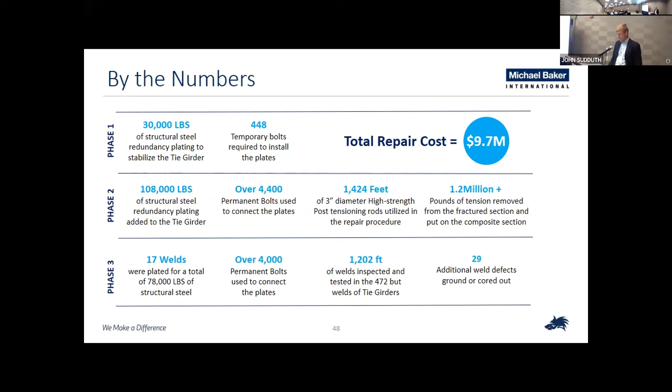With that, I think that gives us just a few minutes here to answer any questions you might have, and appreciate your time here today. Thank you.

Are they going to increase the inspection frequency on this bridge going forward? I believe at this point they're going to still keep it on the biannual. I think that Arkansas is currently reviewing their entire program. That was a part of this coming out there. FHWA went in and did a full review of their inspection, load rating, and kind of their entire program of QC and all that stuff. They've since hired a consultant to go through as well to do a review, and they're going to go through a full review of the process, looking at each of their procedures, providing a questionnaire of what's happening with that, and trying to benchmark them to other states within the country and try to provide suggestions to improve that.

So Arkansas is responsible for the inspection, but Tennessee is the lead on contracts - is that right? Yeah, so it's an interesting situation. In Kentucky here, when we have the cross river bridges, Kentucky inspects and maintains and is kind of the lead agency for about half the bridges, and they alternate with the adjacent states, Illinois, Ohio, Indiana, etc.

For this particular bridge, and I don't know why, Arkansas is in charge of inspection for the project, which was a little unique. Arkansas inspects all of their bridges with in-house staff, they don't have consultant inspectors for their bridges. The only bridge they do with consultants is this one, and they don't even do all of this bridge. Michael Baker was just called in to do everything above the deck, the arch rib. It's too tall for them to get manlifts in there, and they don't have the rope access personnel.